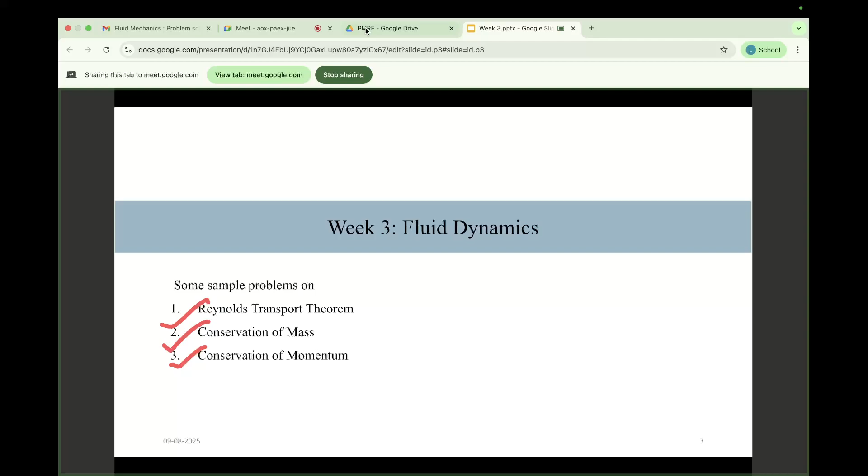Okay, so what I will do today is show a question and give you 1 or 2 minutes to solve it. If you are able to solve the question, please let me know, whether the answer is correct or not. It doesn't matter, but try to answer at least. That will definitely help you. You can answer in the chat box, or you can open your mic and answer.

So what is the first question? The first question is: which of the following is an intensive property? These four are the options. First try to answer, and after that I will explain the concept of intensive and extensive properties. So please try to answer this question.

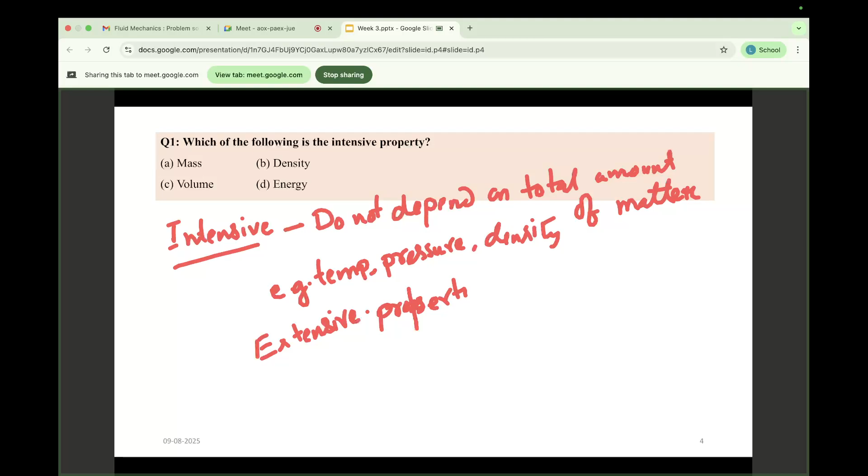Some examples: temperature, pressure, density. And for extensive, mass, volume, energy, momentum, all these are extensive. So how will you quantify which one is extensive and which one is intensive? To quantify this, let us assume a condition. This is a vessel, right? It has a certain amount of water.

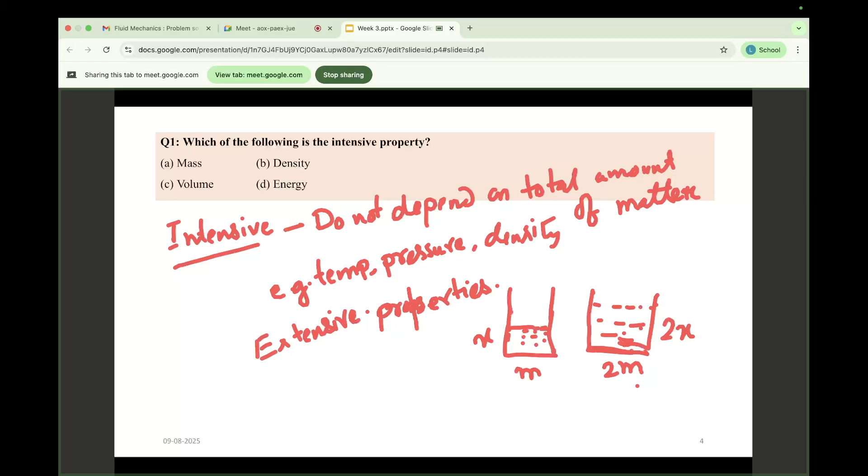So in the same vessel, let this amount be x. If you increase this amount to 2x, some of its properties will definitely change, right? So say m is the mass of this system. If I double this quantity, what will happen? The mass will be 2m. That means it depends on the total amount of material, so it is extensive. Mass is thus extensive.

Similarly, if I talk about density, if I again increase this quantity, it will not change the density, right? Thus density is an intensive property. Also temperature: say in this x quantity of liquid the temperature is T. If I pour another x quantity of liquid, the temperature will not change because I am pouring it at the same temperature. So if increasing the amount of material doesn't change the property, then it is intensive. That's why density is the answer.

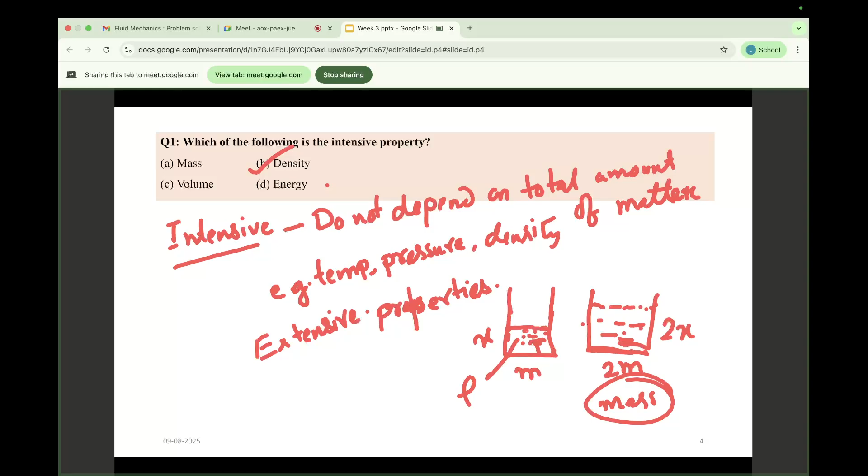And mass is also changing, as I have told. Also the volume, say x, if I increase it, it will be 2x. Energy, whatever energy is carried by this amount of liquid, if I double the amount of liquid, this energy will definitely increase. So it is extensive. The rest three are extensive properties; only density is an intensive property. So it's a good response from you, Arjun and Dev. Density is the correct answer. I think it is clear to you.

I am moving to the next question. The next question is that two statements are given, and you are asked to tell whether these statements are correct or wrong. Either the first statement is correct and second is wrong, like that, these are the four options. This is regarding the Reynolds Transport Theorem. I think in the class this is the first concept of the fluid dynamics part, so you have gone through this. Please try to answer. I am giving you 1 minute.

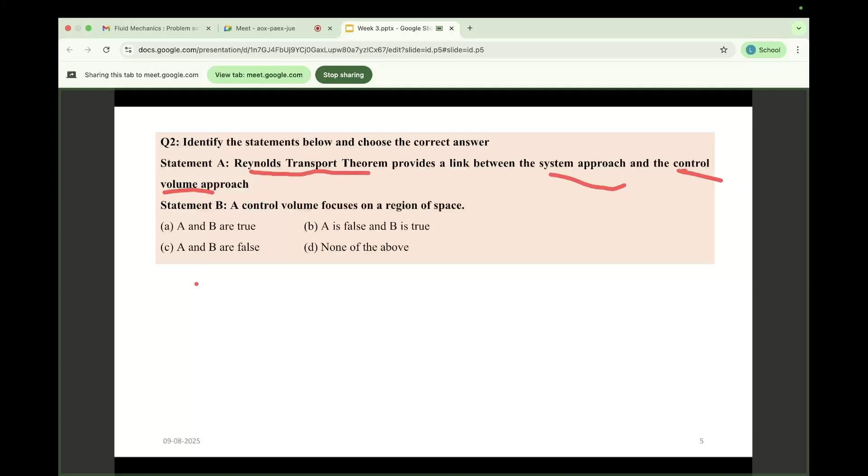Two terms are given here. One is the system approach, next is the control volume approach. So what basically is the system approach, and what is the control volume approach? I represent control volume as CV. The system approach means that in this approach we follow the same set of fluid particles over time. I am giving you a real-life example.

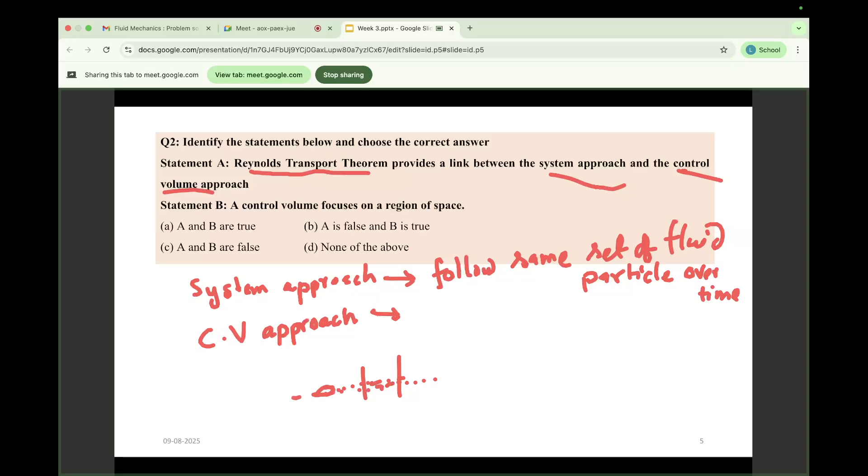Say in a river, a leaf or a bottle is flowing. If you are following this bottle with time, then this is called the system approach, because you are watching this system, this bottle. Whereas in the control volume approach, you only focus on a specific area. You observe this specific region, and at a specific time this bottle passes through this region. This approach is known as the control volume approach.

Okay. So the CV approach is also known as the Eulerian approach, whereas the system approach is also known as the Lagrangian approach. Always remember such real-life examples. In the first case, in a river a bottle or a leaf is flowing and you are following this leaf or bottle. In the CV approach, you only focus on a specific region, observing whatever goes through this region, not the specific object.

That's why the Reynolds Transport Theorem follows both these approaches. It follows a certain portion, and it also follows these sets of fluid particles. So it follows both. And statement B is: a control volume focuses on a region of space, which I have talked about. That's why the correct option is option A. All of you have answered it correctly.

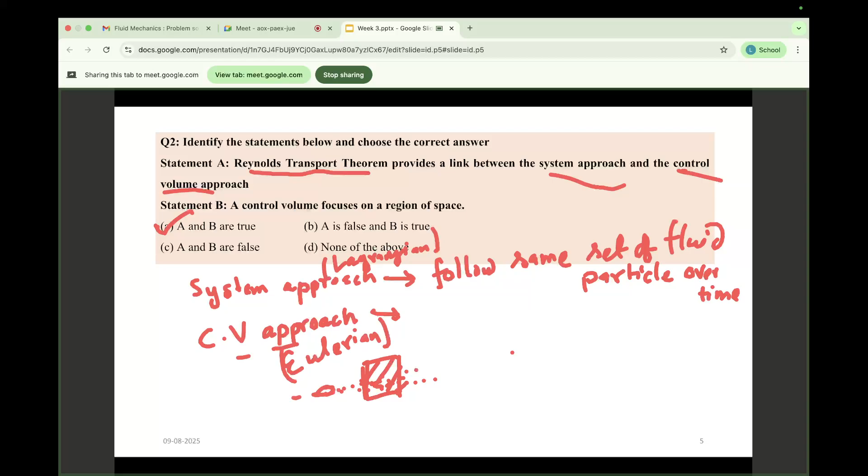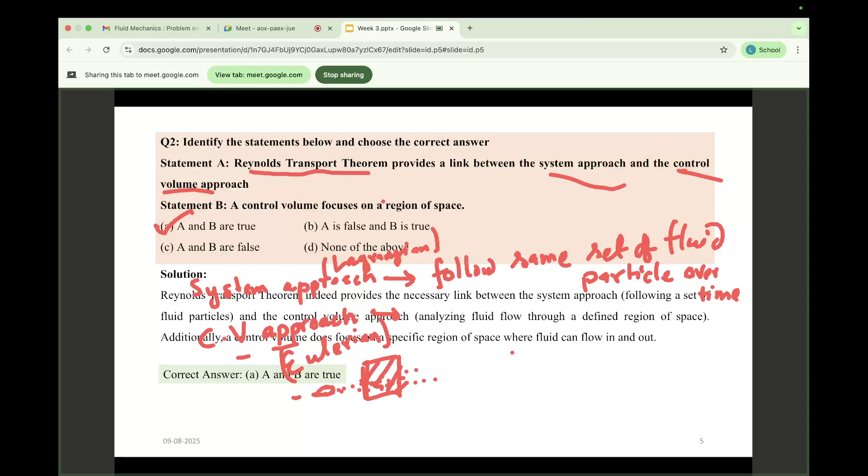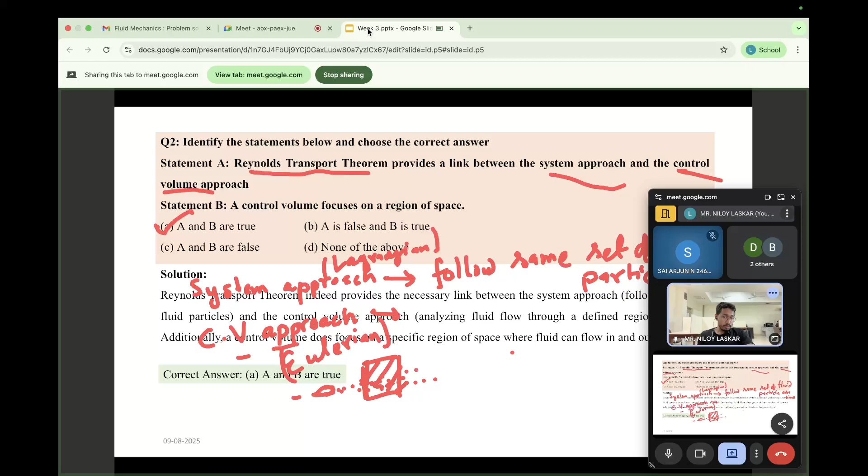Okay, so I am moving to the next question. Any confusion on this concept? Please let me know if you have any confusion, or else I'll move to the next one. Can I move to the next question? I think I can move. Yes, I'm moving to the next question.

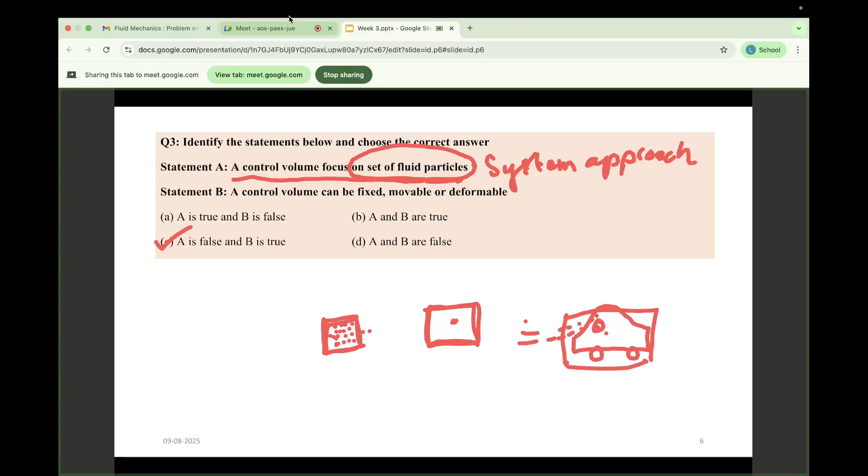So I think both of you have understood the mistake you have made. Is it okay? Yeah, okay. So I am moving to the next one.

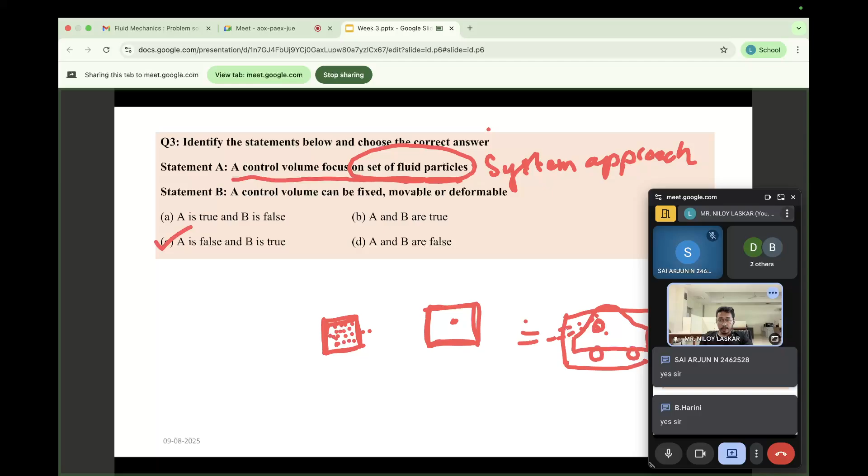Yes, this next question is a basic question. So this question states, the continuity equation is based on the principle of either energy, momentum, mass or force. Which one? So please try to answer.

Yes, one has answered option B, momentum, and another option C, mass. And that is energy. So three different answers I have got. So okay.

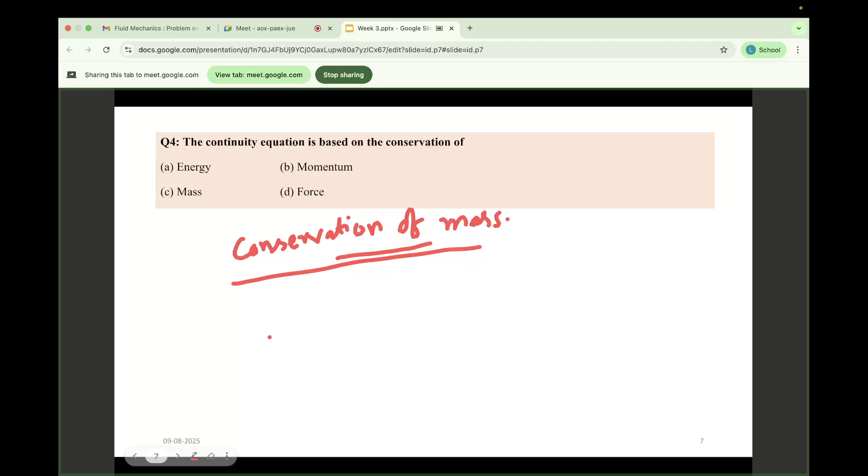So say this is a body. This is the inlet, this is the outlet. So what this law states is, whatever is entering through this inlet and whatever is coming out through the outlet, that should be balanced. Say if a certain particle m1 is entering into the system and m2 is coming out of the system, then m1 minus m2 means a certain mass is stored here.

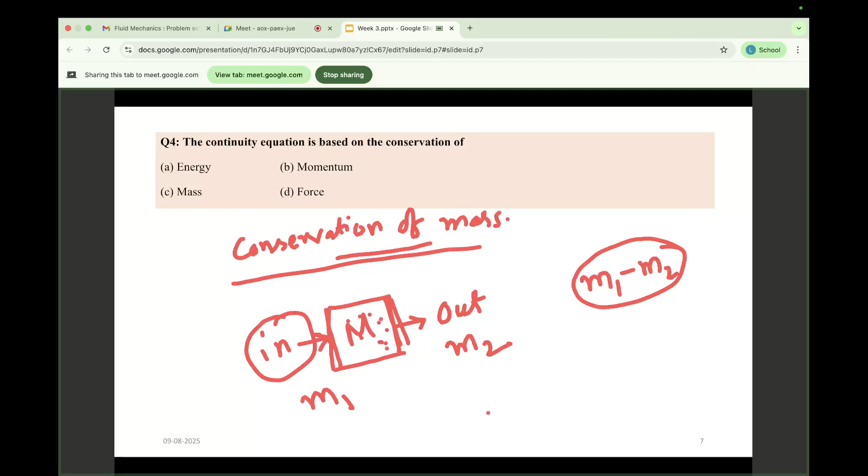Okay, so that is what this theorem tells, that if m1 is entering into the system and m2 is coming out of the system, then there must be something that is kept here. Say I call this capital M. That means if m1 is entering, what is entering is m2 plus M, because the total entering through this inlet is m1 and only m2 is coming out and a portion is left in the system, that is plus M. So that is the fundamental concept.

And say if it is an incompressible fluid, in case of incompressible fluid, what will happen? So I am erasing this and writing it again for you.

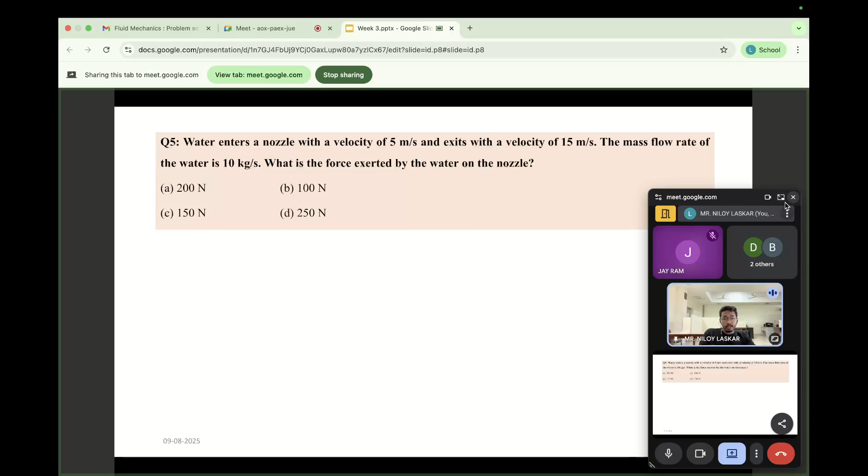So see, in this question, what is given? The water enters a nozzle with a given velocity, right? This is the inlet velocity and this is the outlet velocity. The mass flow rate of water is also given. You are asked to find out the force exerted by water on this nozzle. So that's a simple question.

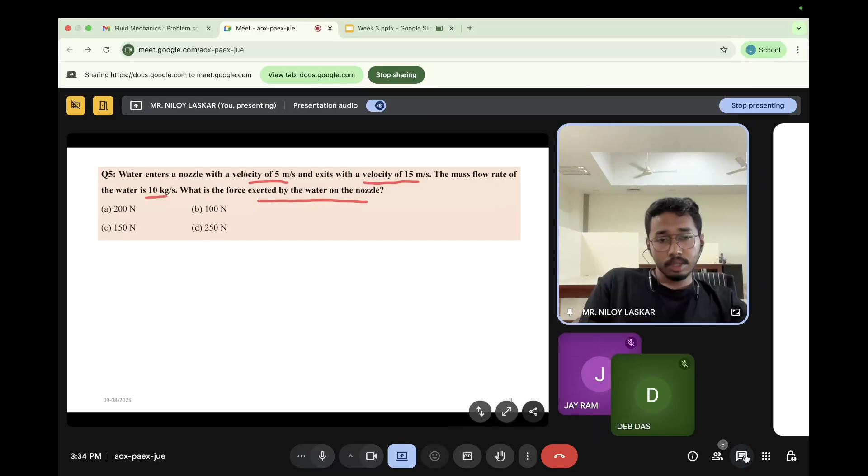So please try to solve. I am giving you 2 minutes to solve this question, and if you are able to solve it, please answer in the chat box, or you can also turn on your mic and answer. So Harini has answered option B, that is 100 Newton. Let's see what others are answering.

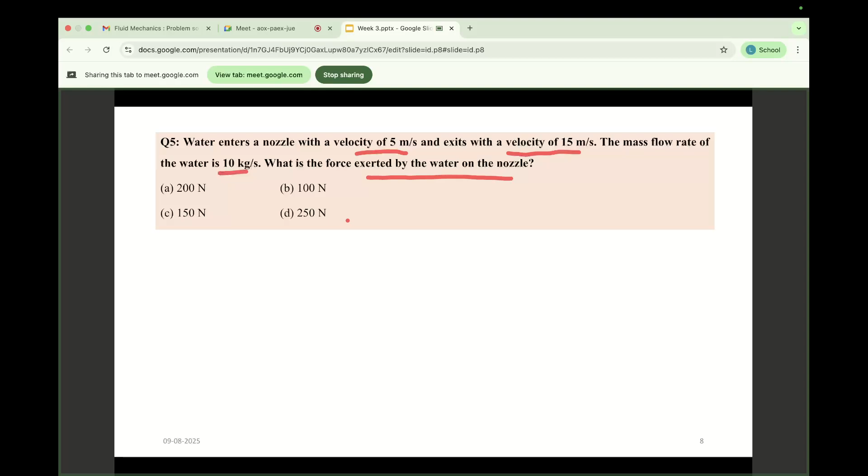So I am solving this for you. Nihalini has answered. So see, from the conservation of momentum equation. In the last slide I discussed two things: one is the conservation of mass, the other is the conservation of momentum. Just a minute, I am just confirming this. What I talked about is conservation of momentum, and the previous one I discussed is conservation of mass.

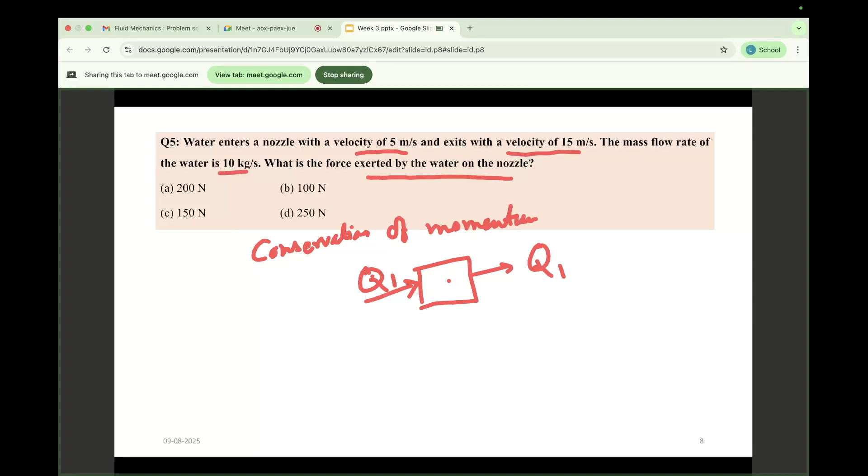So for momentum, whatever flow rate is entering a system, it should come out with the same flow rate. I am talking about mass flow rate, not mass. If it is mass, then this is conservation of mass, but in momentum, it should be the momentum carried by this mass, that is q1, and this should be q2. Okay, so here they are talking about force.

So what basically is force? Force basically means the mass flow rate, whatever mass is entering this system, into outlet velocity minus inlet velocity, right? So m dot is 10 here, V outlet is 15, V in is 5. So that is 10 into 10. So the correct answer is 100 Newton. Your answer is correct.

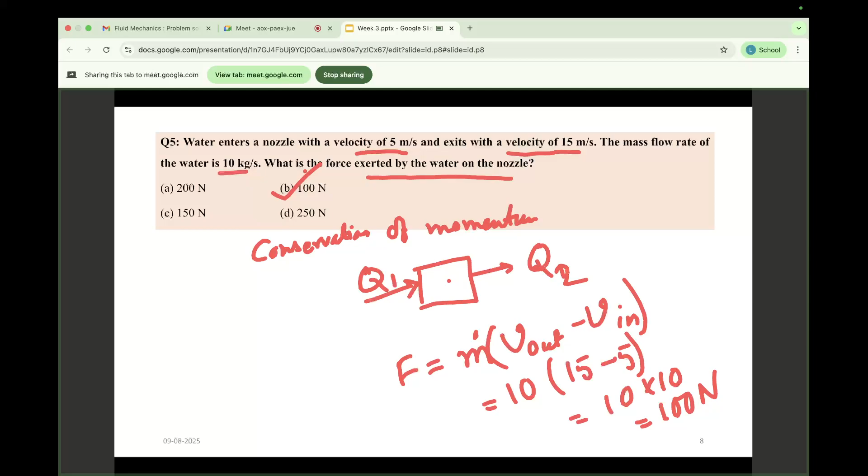So I think you have understood this. Please rectify what I discussed in the earlier session. Most probably in the earlier slide I called this conservation of mass by mistake. It's conservation of momentum. So I am moving to the next thing. This is the next question.

In the first 5 questions, the level was quite easy, and as we move to the upcoming questions, the level will slightly increase. So you better use your concepts, that will help you clarify all these things.

So first, what is given? Consider a steady and incompressible flow through a converging nozzle. The cross-section area is given for the inlet and outlet, and also the velocity of the inlet is given. So you are asked to find out the velocity of the outlet.

So what I have told in the earlier slide, which concept is linked with this velocity and mass? That is the conservation of momentum, right? What basically is momentum? Mass into velocity. So as this velocity is given, indirectly this conservation of momentum will come into play. If the mass is given for a certain question, you first think about conservation of mass, and after that you think about conservation of momentum.

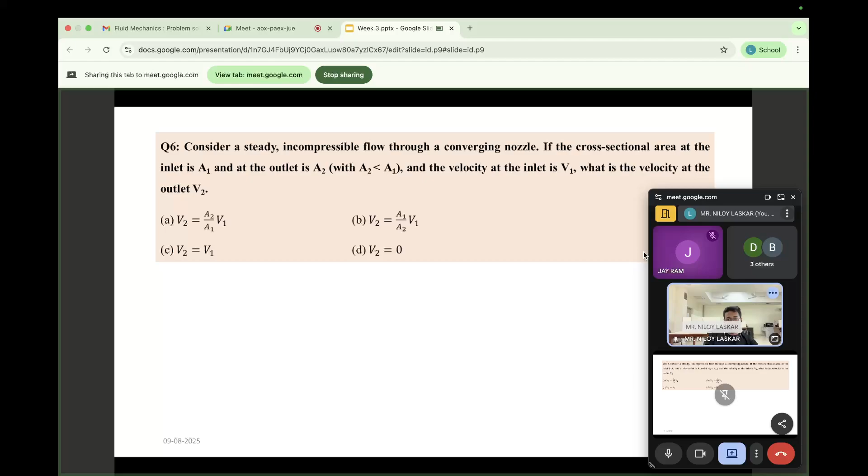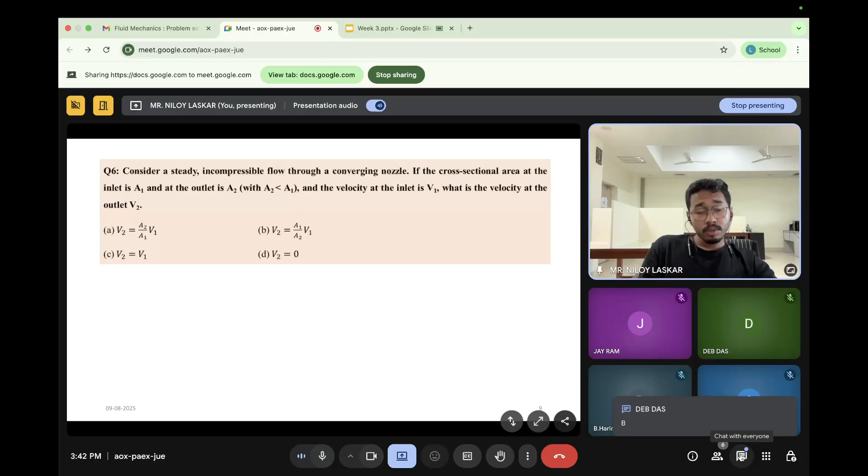So please try to solve this question. I am giving you 2 minutes to solve this one. So Rani said option B. So Jairam, you please try to answer. So please try to answer. So two people have answered option B. So let me solve this one.

So for any steady flow, what does this equation basically state? m dot means mass flow rate. So if I talk about this continuity equation, whatever is entering the system should come out. I means inlet and O means outlet. So whatever is entering the inlet and whatever is coming out should be the same. Say this one is m1 and this one is m2. The dot represents mass flow rate, that is change in mass per unit time. That is equal to rho A V. That is the formula, right?

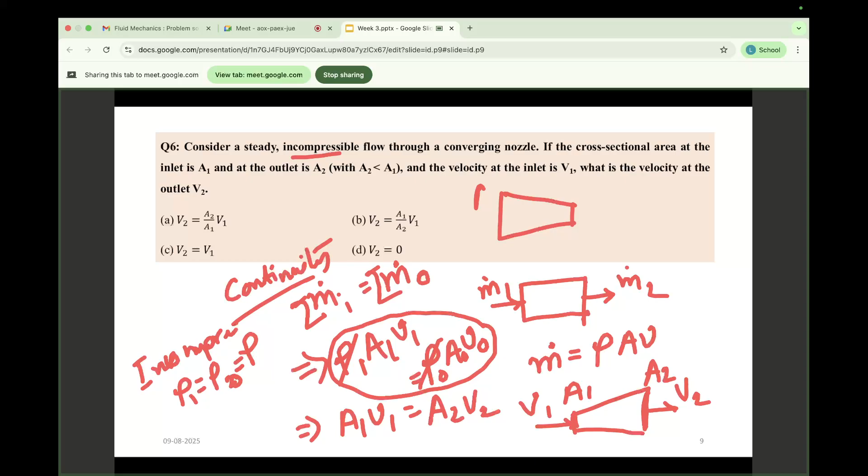So in this question what is given? The area is more at the inlet and smaller at the outlet. That means they are talking about a converging nozzle. Here the velocities are V1 and V2. We are asked to find V2. So V2 equals A1 by A2 into V1. That's why option B is the correct answer. It's great that you are answering. I think it is clear to all of you.

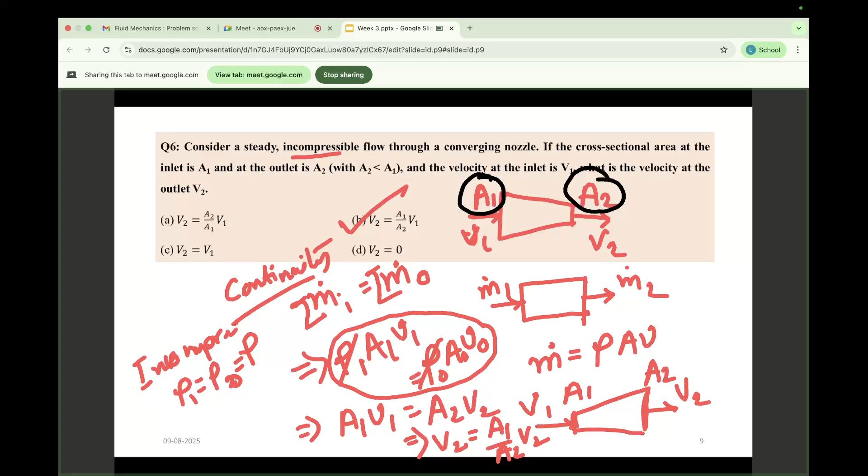Now, just a question for all of you. In this question it is given A1 is greater than A2. Can you tell whether V1 is greater or V2 is greater? This question can be asked. So please try to answer. Which one will be greater, V1 or V2? So Arjun, Harini, Deb, Jairam, anyone? Please try.

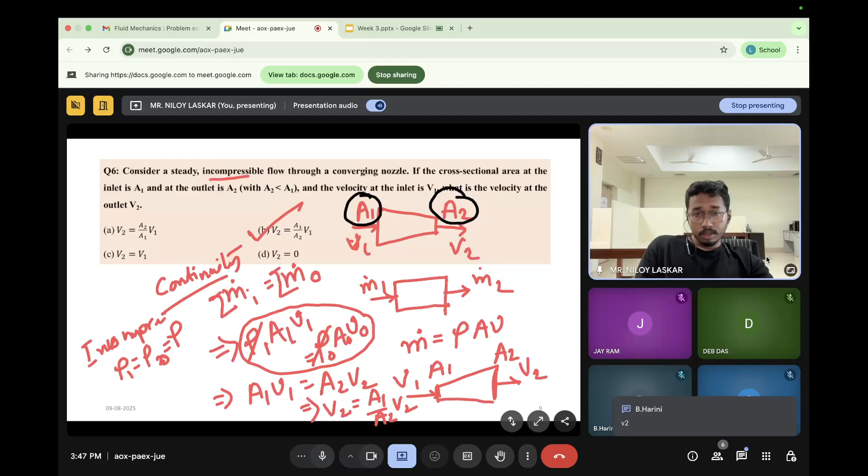So Harini's answer: V2 will be greater. That is correct. Why? V2 equals A1 by A2 into V1. Since A1 is greater and A2 is smaller, if I divide these two, the value will be greater than 1. So that's why V2 will be greater than V1. So I'm moving to the next one. Our correct answer is option B.

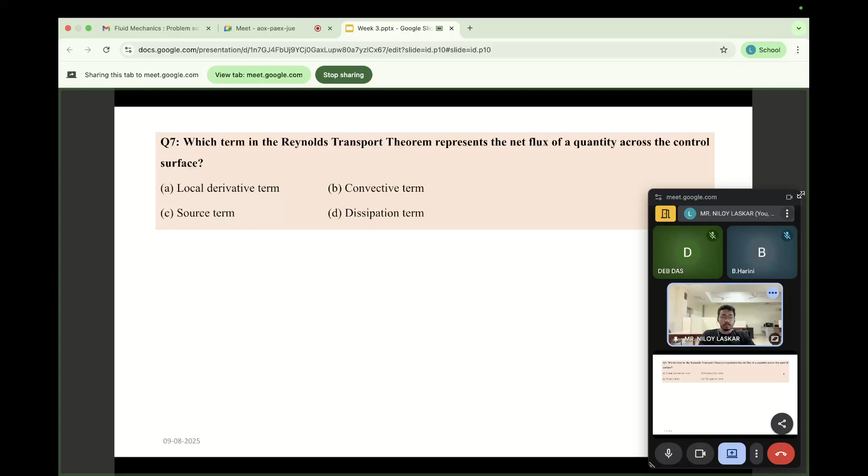So as you have gone through these classes, first let me write this equation for you. This is the Reynolds transport theorem, more specifically known as the RTT equation. So I am writing it in generalized form. That means you can write this equation for mass, momentum and energy. So any property, it may be mass, velocity, temperature, I represent it as B. So that is B of system.

So what does this equation tell? The derivative dB by dt means rate of change. If in the derivative denominator there is t, that means the change of this parameter with respect to time. This thing is indicated here. Next is CV, density into a term beta. I am explaining all these terms for you. First let me write down this equation.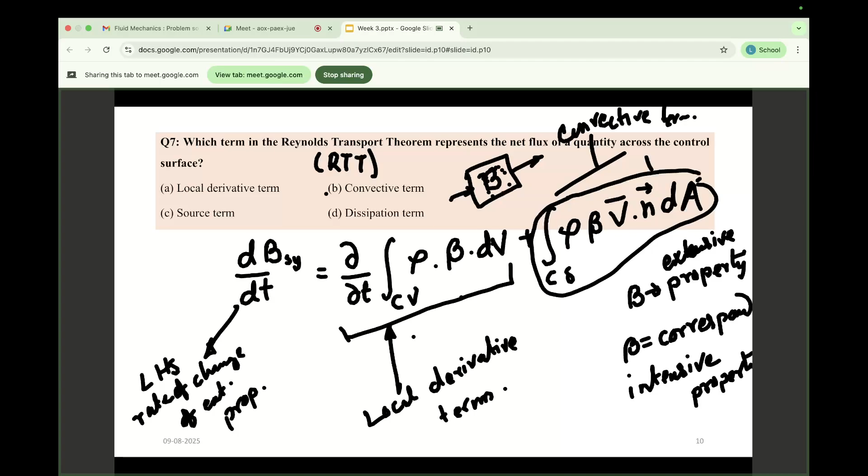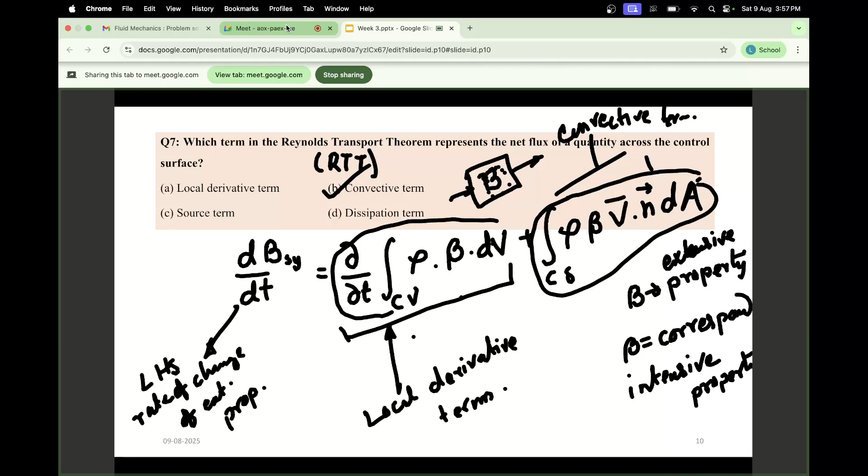And the second term is the convective term, the most important term. It represents the amount entering into the system and the amount coming out of the system, that means the net flux. The word flux indicates whatever is coming in and going out of the system. So this second term on the right hand side is the convective term, and the first term indicates whatever is accumulating in the system. I think you understand this concept.

So please go through this concept, because if you are appearing for this NPTEL course exam, you can find such types of question. They will not ask you to write this equation, but they will ask you basic concepts, like which term will represent the accumulation inside a control volume. Then you can say this local derivative term. Okay, so that is the thing.

So I am moving to this next question. Again, it's another question on this concept of RTT, Reynolds Transport Theorem. So what is the question? In the context of RTT, which of the following statements is most appropriate? So please try to answer. I think I have discussed that in the earlier slide. You remember this system approach and the control volume approach. In this slide, I have talked about this thing. So please try to answer.

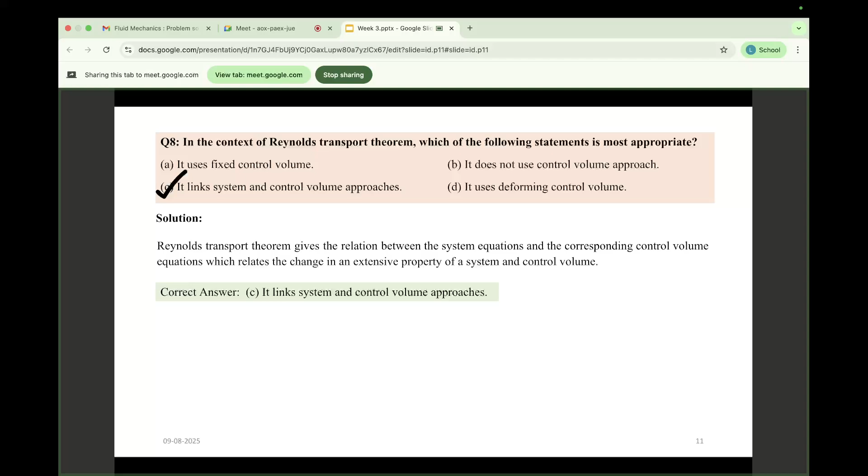So I am moving to this next question. It's a quite interesting question, again from the RTT theorem. As I have told you about this RTT concept in detail, and also the parts of this equation, can you please answer this question? So please try. It's a tricky question, but it's the full equation that I have written. The left hand side, right hand side, two terms: the local term and the convective term.

So René has answered option A. Okay, let's see what they are answering. D. Okay, say it's option D. And they have answered option C. So I think there is a confusion for them. Yes, option D is correct. That is true. So why?

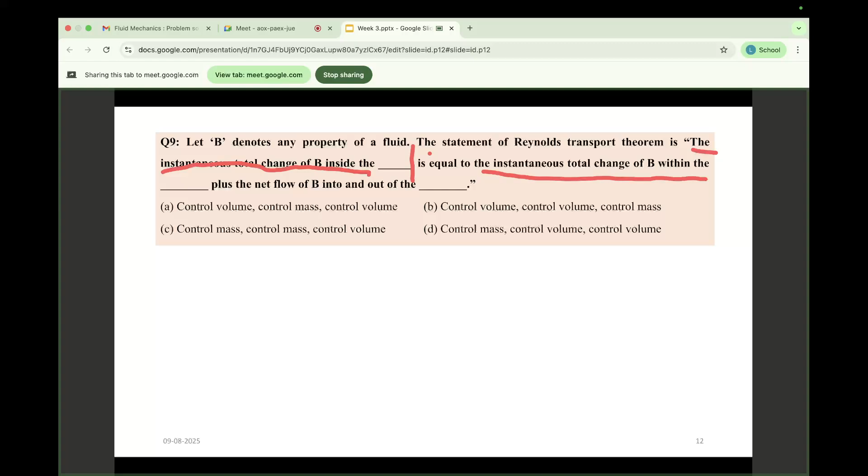Even if you do not remember this equation, understand one thing: it incorporates two concepts, the system approach and the control volume approach, right? So on one side there should be the system approach, on the other side the control volume approach. If I split this statement into two parts: the instantaneous total change of B inside the control mass is equal to the instantaneous total change of B within the control volume plus the net flow of B into and out of it.

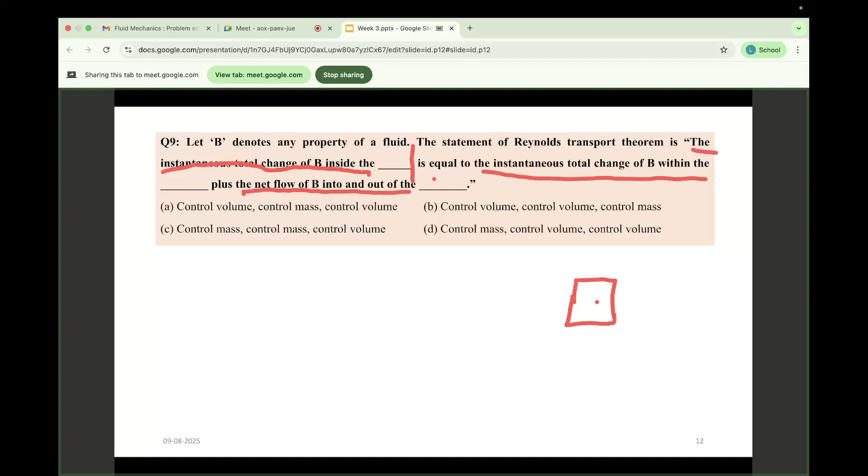Remember I talked about this thing. Here it is clear that I am talking about the control volume, because whatever is coming into and going out of this control volume, I am talking about that, right? And the first is the instantaneous change of B within, meaning whatever is accumulating, that is talking about the CV. So the right hand side is all about the control volume approach, and the left hand side is about the control mass approach. That's why option D is the correct option.

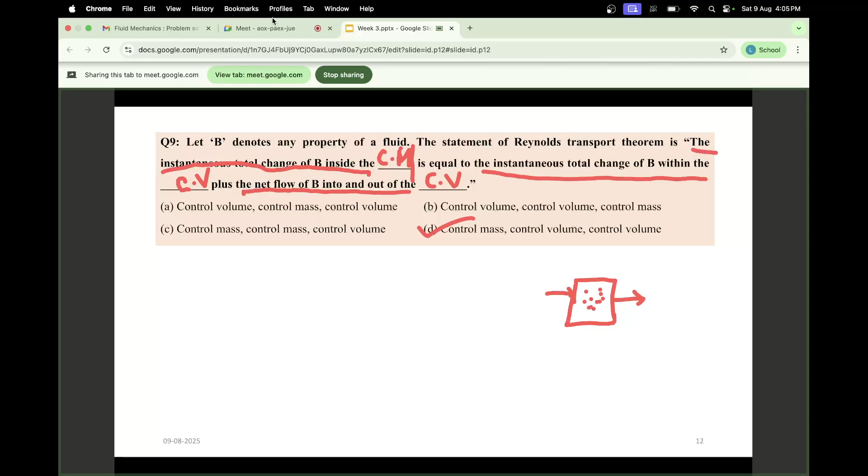So see how this concept is quite important. If someone understands both concepts, the system approach and the control volume, then they can easily answer this question. So have you understood the mistake that you made, or is there any confusion from your side? Okay.

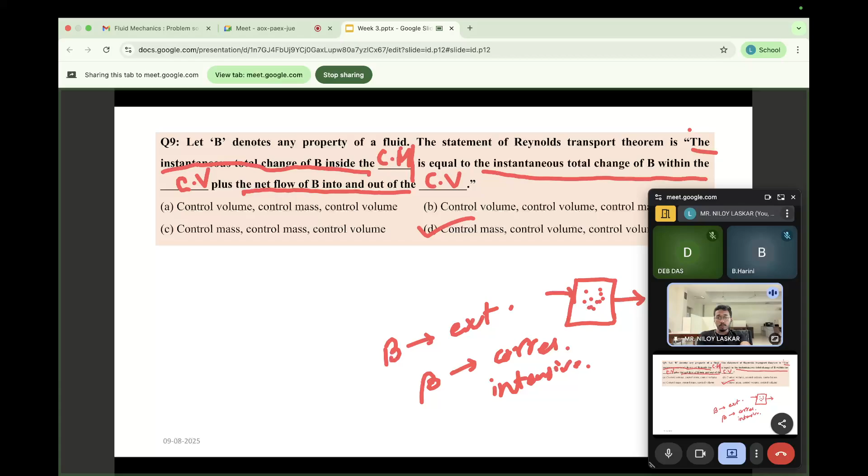Another thing, I have talked about B and beta. What is B? B is an extensive property and beta is the corresponding intensive property, right? So please remember this concept. It is quite important. Based on this I am giving you one question, so please try to answer. So this is the question.

So what is given? Momentum is one of the extensive properties of the fluid; because it depends on mass, it will definitely be an extensive property. This momentum is represented by B, as given in this question. You are asked to find the corresponding intensive property of the fluid. So René said option B. Let us see what they are answering.

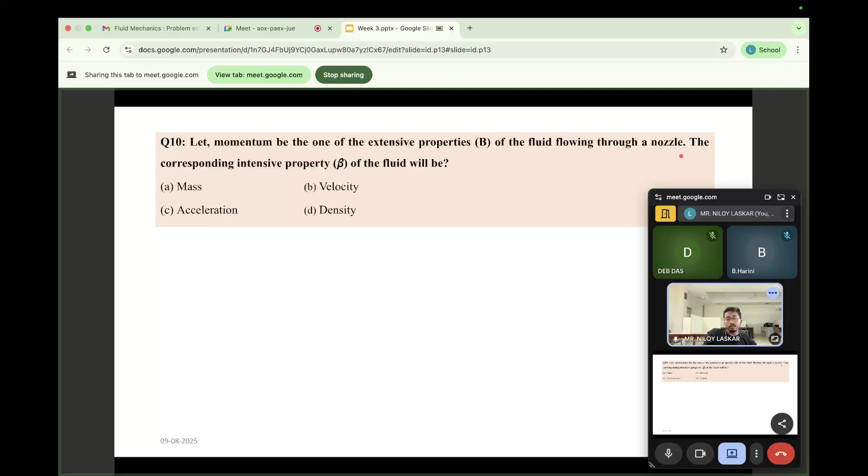They are saying that it is mass. So again, they are confusing themselves with this concept. Just a minute.

So see, as I have already told, B is my extensive property. So what is the basic difference between extensive and intensive property? The basic difference is this: intensive property is independent of the quantity of matter in the system. So this one is my extensive given, and beta is the intensive.

So as beta is independent of the material of the system, that means here I have to take the derivative with respect to mass. Okay, mass is the amount of material in the system. That's why it is a derivative, or someone can directly divide B by m, but the feasible solution always is the derivative with respect to the quantity of the material. It can be mass or it can be volume, right?

So what B is given in this question? It is the momentum. We know momentum is mass into velocity, right? So velocity is a constant here, so v will come out and the derivative of this is 1, so it should be velocity. That's why the correct answer is option B. So option B, velocity, is the correct answer.

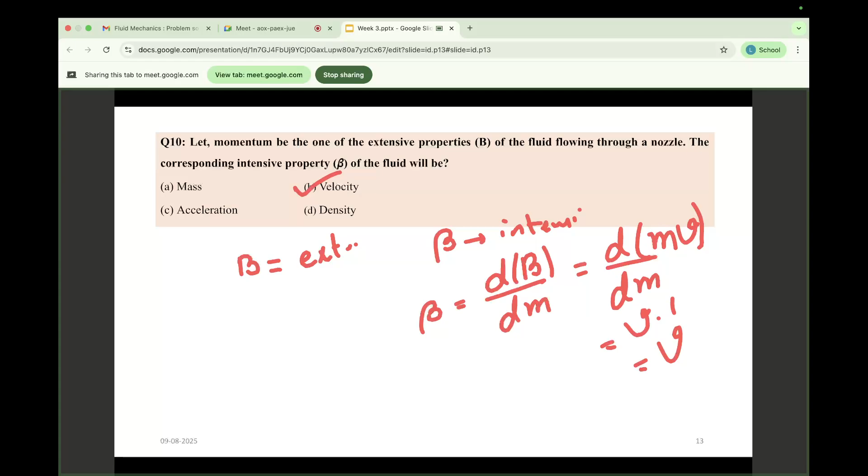See, this RTT concept is quite important. So I will again suggest that you please go through this concept clearly and try to understand each and every term precisely, because it's not just for this exam. If you are in BTech, it is quite important for you, because you have to do your project on all these things, maybe on heat transfer or fluid mechanics. Even in interviews or placements, they can ask you basic questions. They will not ask you to write this equation, they will ask you what is the significance of this equation, like that.

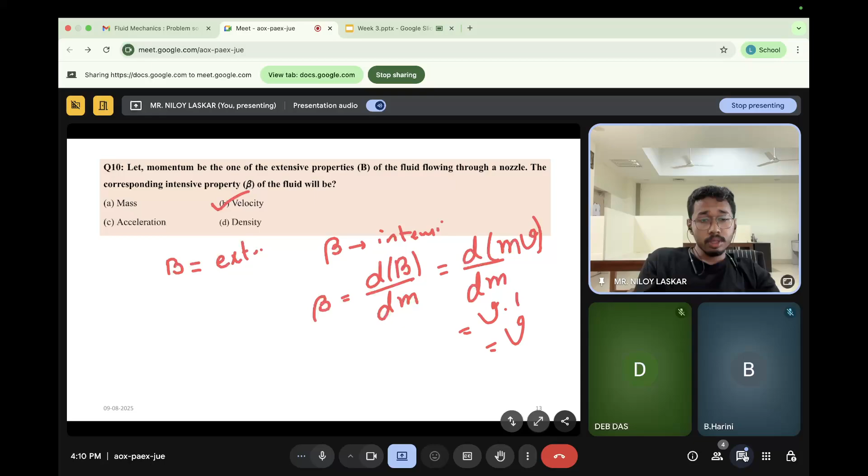Okay, so you both are in. So any confusion, Harini or Deb? Hmm. So you are in BTech or MTech? You both? Okay, so you are in BTech. So that's great. So you will get to understand a lot of things.

So whenever you are learning a course like fluid mechanics, which is an interdisciplinary course, even mechanical students are learning these courses, please try to correlate each and every concept with real life scenarios. One of the important ones is the Lagrangian approach and the Eulerian approach. If someone asks you the difference, the Lagrangian approach is the system approach, and the Eulerian approach is the control volume approach.

If someone is not from the engineering department, say from basic science, arts or commerce, they will not understand this concept. So if someone asks you, how will you tell them? You can tell them with a real life example. Say a bottle or a leaf flowing over a river. If you are focusing on this bottle, then it's the Lagrangian concept, right? The words seem complicated, but the concept is quite easy. And if you focus only on a specific region in the river, then it's the Eulerian approach.

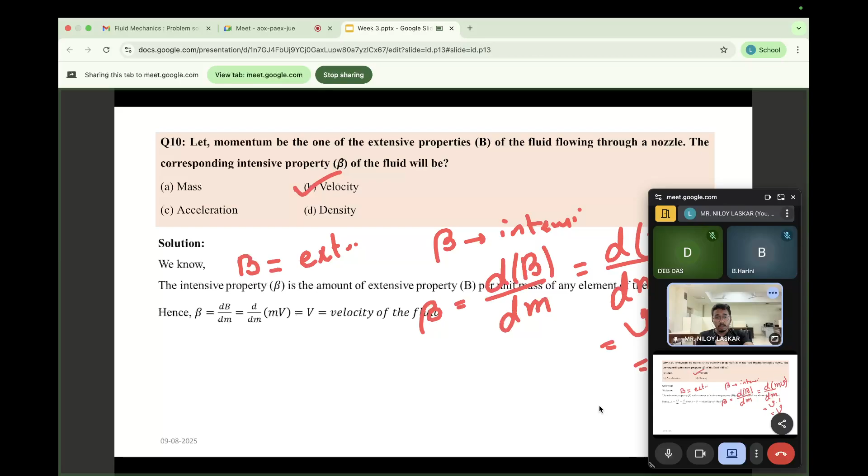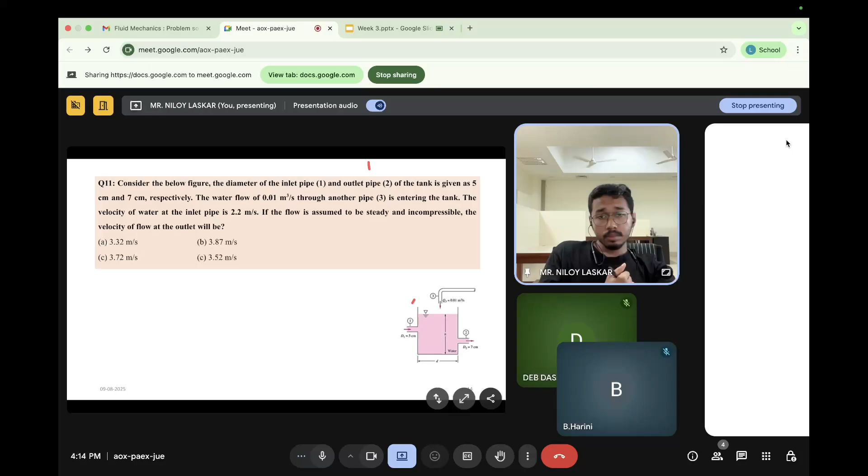Also the flow is assumed to be steady and incompressible. The velocity of flow at the outlet will be? So you are asked to find out the velocity of the flow at the outlet, that means V2. So please try to understand. So see, this is another conservation equation. I am giving you 2 minutes to solve this one.

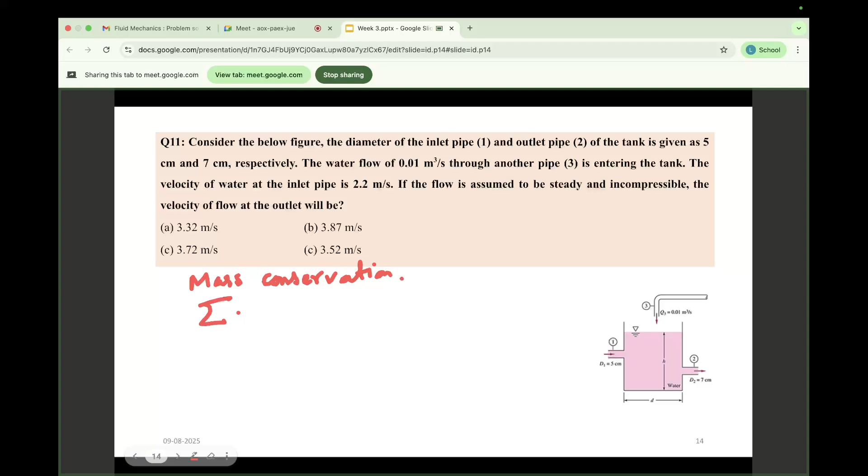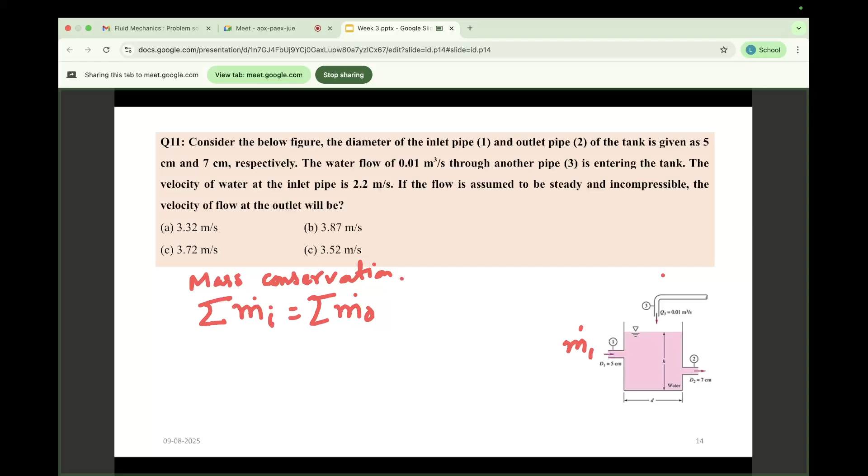Mass conservation. So mass inlet equals mass outlet. So what is mass inlet? From 1 mass is entering into the system, and from 3 mass is entering into the system, and mass is coming out from the system, so the outlet is M2. So in place of summation of Mi, I can write M1 dot plus M3 dot equal to M2 dot. So I have to find out the values of M1, M2 and M3. The general formula of mass flow rate is rho AV, or I can write rho Q, since Q is AV. Q is the volume flow rate.

So here, is density given? Density of water, since in this problem everything is water, right? So in case of M1, I write rho. I am not putting the value of rho because rho is common in all three. Here the diameter is given, so I have to apply the area formula. Area equals pi by 4 into d square. The diameter is 5 centimeter, that means 0.05 square, into velocity, which is given as 2.2. So in place of m1 dot I can write rho pi by 4 into 0.05 square into 2.2. So I got m1, right?

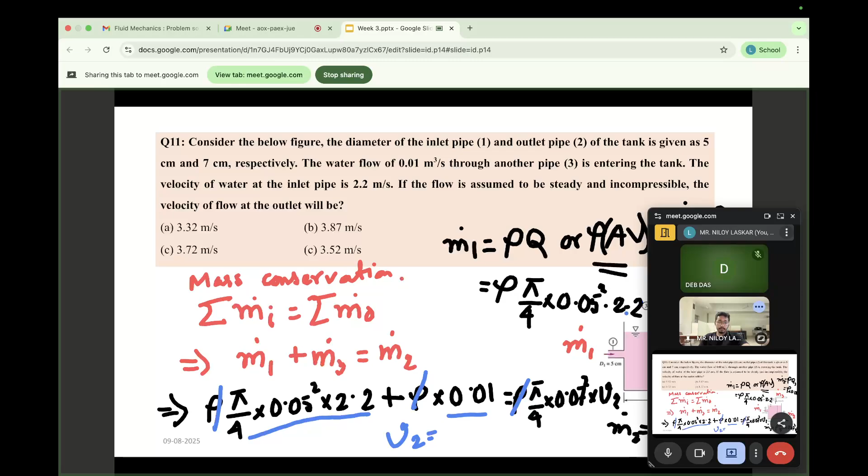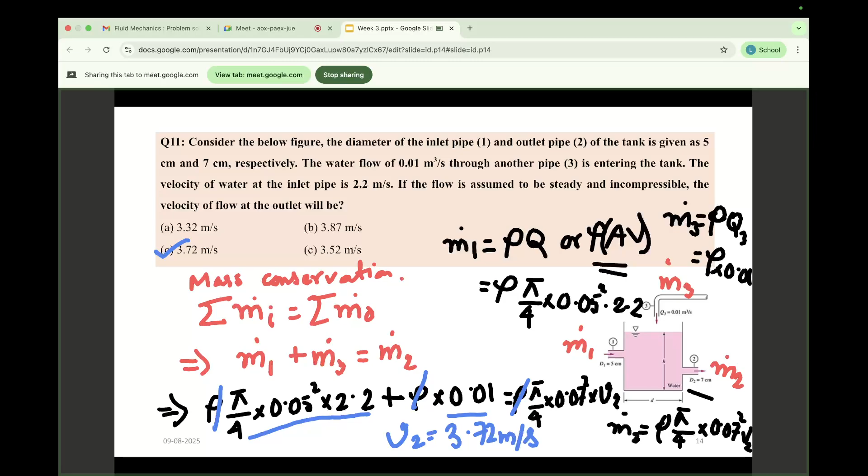So the correct answer is option C, 3.72. So accordingly you can find this V2. Okay. So I am moving to this next question.

So in this question, what is given? A cylindrical tank of radius 1 meter is filled with water up to a height of 2 meter. Another thing that is given in this question, water is being pumped into this tank at a rate of 0.1 meter cube per second. So Q is given. So you are asked to calculate the rate of change of mass of water in the tank. So these are the four options. This is the similar type of question that I have discussed in the earlier one. So please try to answer.

So I am giving you 1 minute time to answer this one. Please try to answer this one. This is similar to what I have discussed in the earlier question. So they have answered option A.

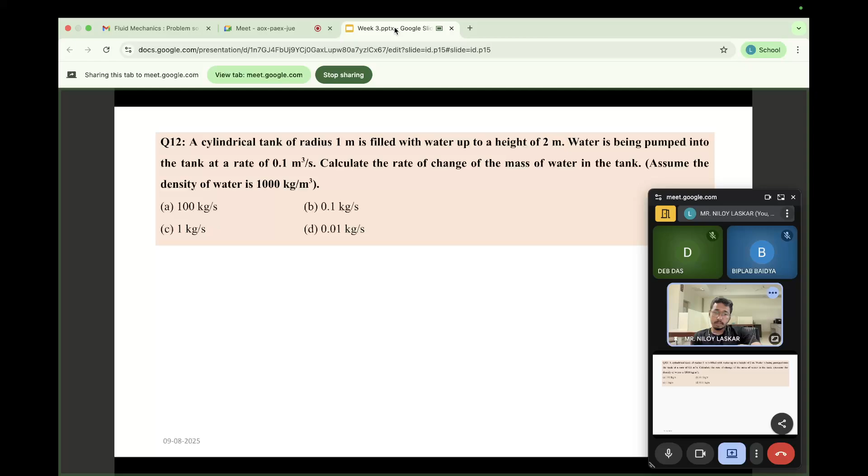Okay. So Biplab, can you try, or I will solve it for you? Okay. So I am solving this thing. So please have a look.

Again, the similar concept is here. Say this is the tank. In this tank, up to this water is already there. It is given 2 meter height, and all this is given. And say from somewhere here, Q is coming as 0.1. That means this is the inlet, mass flow rate in the inlet. So you are asked to find the rate of change of the mass of the water.

So in this question, whether some amount of water is coming out of the system or not, nothing is given. That means whatever is pouring into the system, it is storing here. And also it is not said that it is a steady flow or a steady system. So from the conservation of mass equation, they are asking to find the rate of change of mass of water. So that means dm/dt.

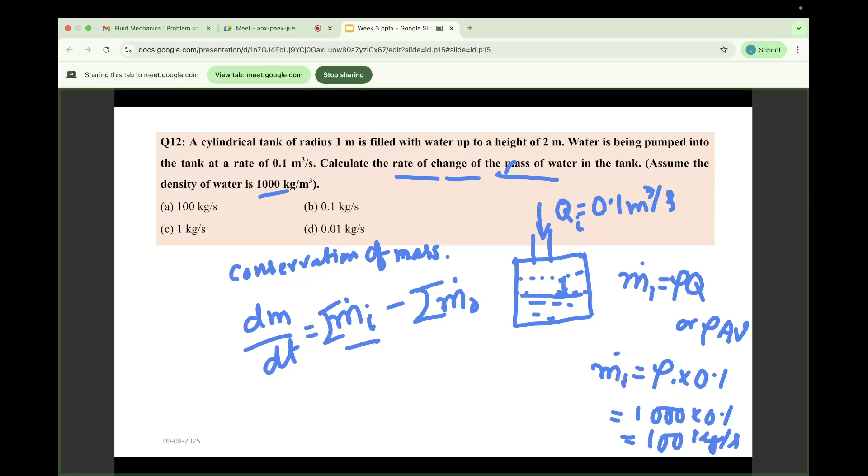This M1 dot indicates Mi, because in the inlet the mass is entering through only one area. So instead of this one I can write M1 dot. And outlet, is there any outlet? No outlet is there, right? As no outlet is there, I can say this term is 0. So what is M1 dot? M1 dot is 100 kg per second. Okay. So option A is the correct answer.

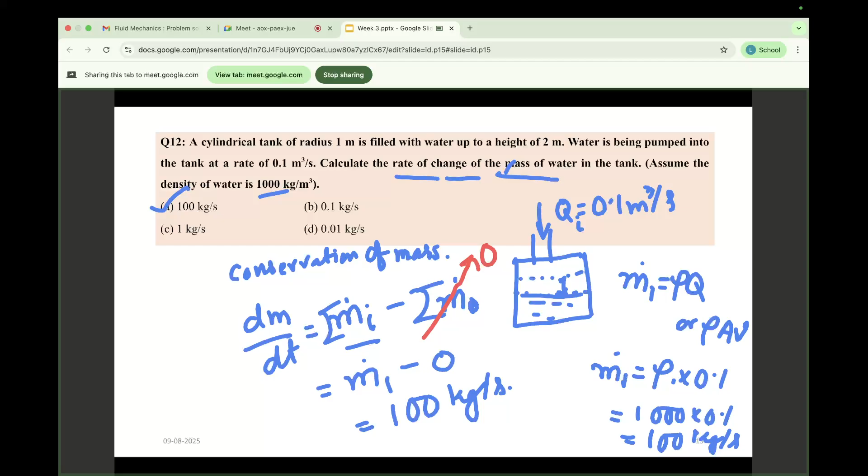Is it clear to you? Is it clear to you, Biplab and Deb?

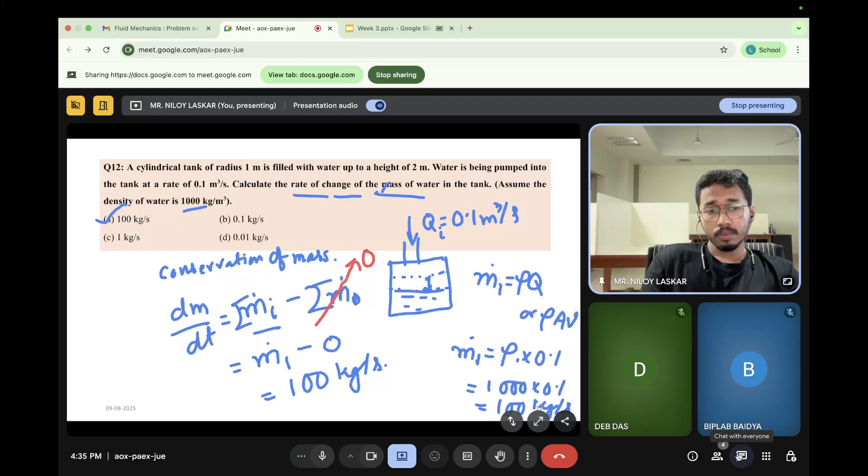So if you have any question, you can ask me, or I will move to the next slide. Kindly let me know. So I think it is clear to you, Biplab. So I am moving to the next one.

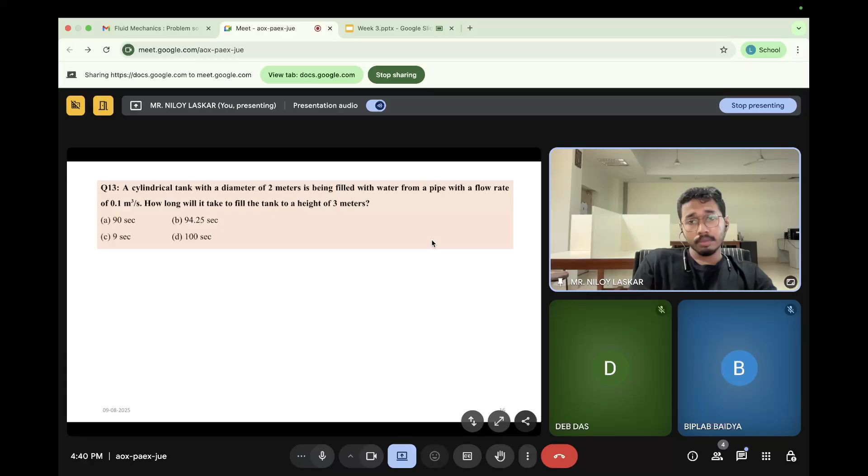So see, what basically is given here? In this question, the diameter of the tank is given. So say this is our tank, right? Diameter is given as 2 meter. This height h is given as 3 meter. So up to this height we have to fill through a pipe. So here Q is given, Q is 0.1.

So first I am calculating this volume. Volume here is pi r square h. What is r? Diameter is 2, so r should be 1 meter. So 1 square, and height is given as 3. So I can write it as 3 pi. Okay. So Q is given. We have to find how long, that means the time it takes to fill the tank.

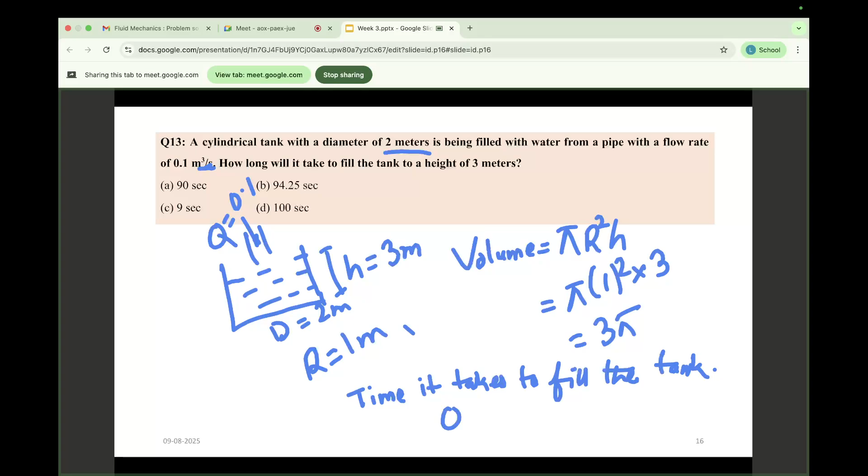So time it takes to fill the tank. The unit of Q is 0.1 meter cube per second. That means the volume per second. So if I multiply Q into t, what will I get? Q into t is equal to this volume, right?

Therefore I can write T equal to V by Q. So volume is 3 pi and Q is given as 0.1. Now pi is 3.14. So 3 into 3.14 divided by 0.1. Please calculate. If you calculate, you will get the answer as 94.25 seconds. So that is the answer. So is it clear to both of you?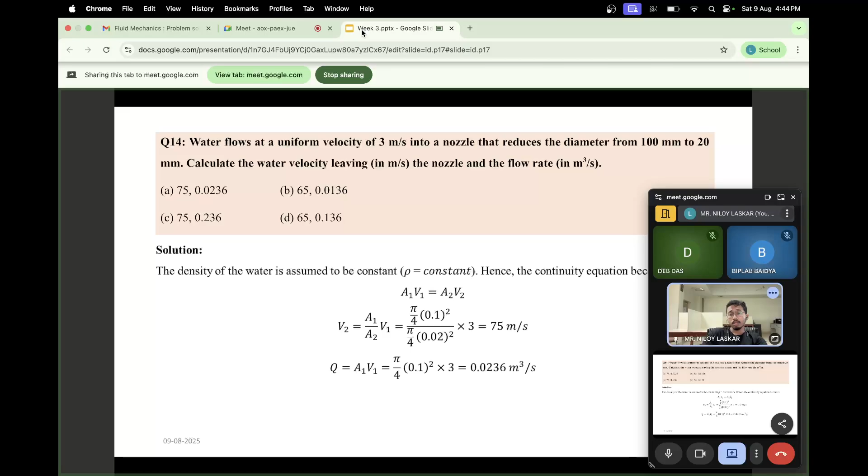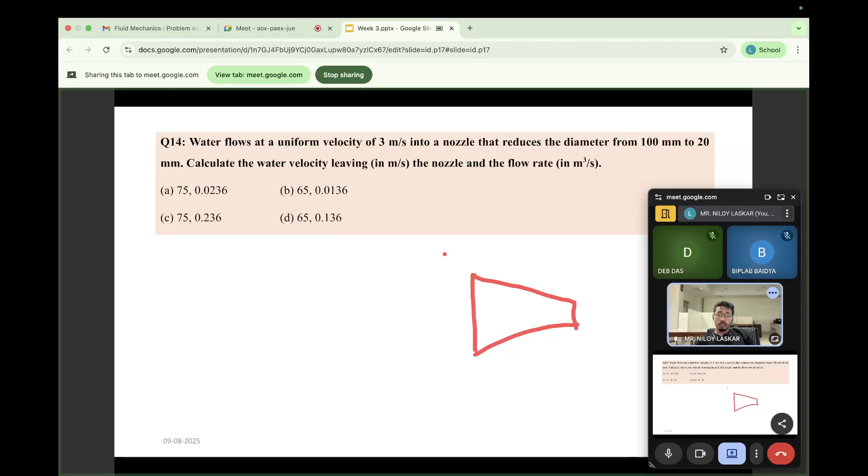So that is the question here. So I am just drawing this diagram for your better understanding. So in this question, say that a nozzle is there. So here area A1, A2, and say this velocity is V1, this one is V2. So given diameter is 100 mm, here diameter is 20 mm.

Okay. So you are asked to find V2, because already V1 is given as 3 meter per second. So you can use this concept, this continuity equation. So please try. I am giving you 2 minutes to solve this one also. So see, similar types of question I have discussed in the earlier slide. So try to utilize this continuity equation and you will be able to solve this one.

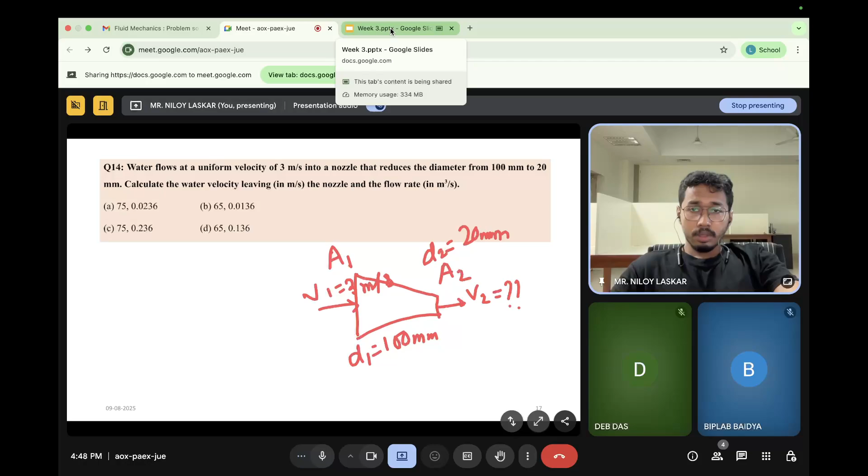So I am solving this one for you. So please have a look. As I have mentioned in the earlier slide, if in any question velocity or mass flow rate is given, you first think of the continuity equation, that is the conservation of mass equation, and after that go for the momentum equation. So what does this continuity equation, or the mass conservation equation, state?

So see, water is given, right? In a nozzle, we know there is a steady flow, so no accumulation. In this question, there is no talk about accumulation. So whatever mass enters the system and the mass coming out of the system should remain the same, because nothing is accumulating. At the inlet, area and velocity are given. So I can write rho A1 V1 equal to rho A2 V2, because at the outlet the mass flow rate is rho A2 V2.

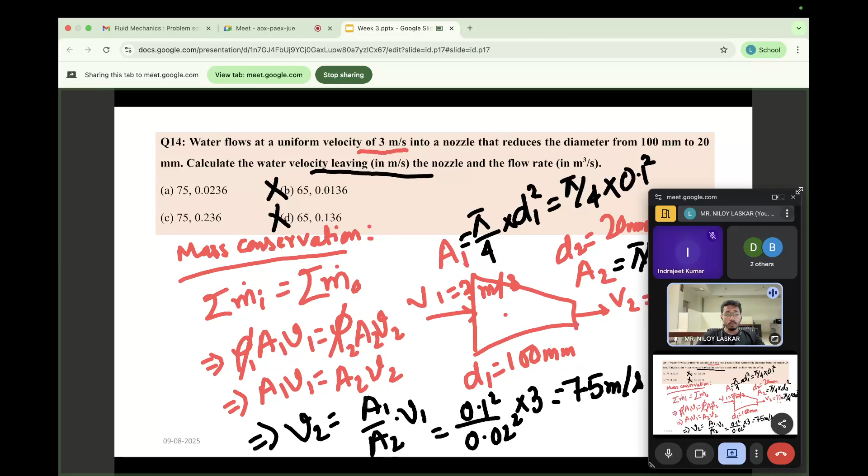Next they also ask to find the flow rate. What is flow rate? This flow rate basically is Q. They are asked to find Q. And I know that whatever the value of Q1 and Q2, they should be the same, because mass inlet and outlet are the same. So I can write Q as A1 V1. If someone wants, they can also calculate using A2 V2.

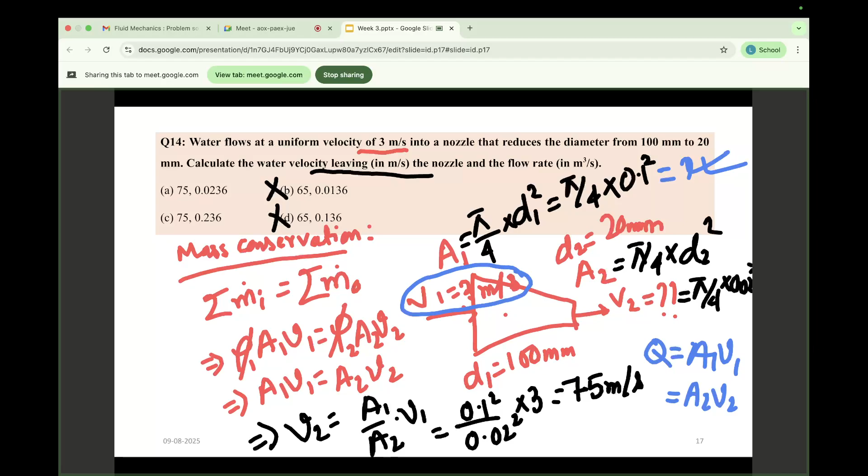So A1 is this one, you will get some value here, and V1 is 3. So you just put down this value, or you can put down V2 and A2. The answer you will get is 0.0236 meter cube per second. So that's why option A is the correct option here. Okay, that is the solution. This is a simple question.

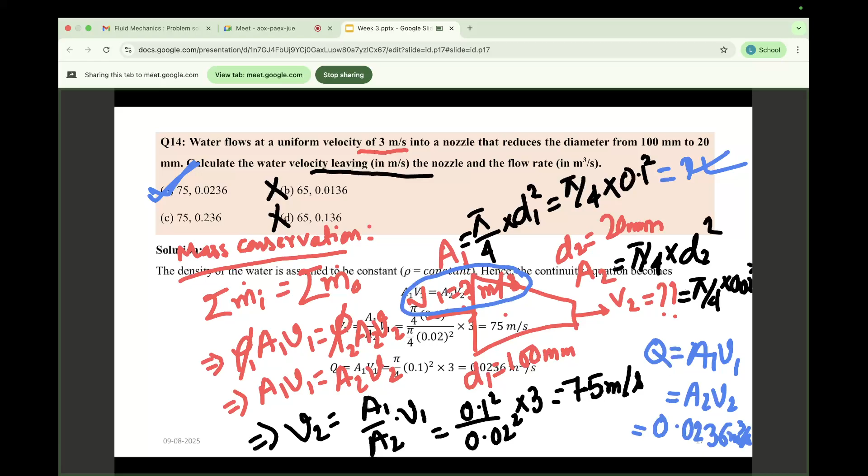So I am moving to the last question of this session. As you have gone through this concept, you can easily answer this one. A figure is given where there is an inlet represented as 1, and 2 outlets. It is asked to find the rate of change of mass of water in the device. That means something is accumulating in this system, so the mass flow rate entering and the mass flow rate coming out should not be equal. So please try to calculate.

Deb and Biplab, please try to calculate. This is the last question for today. So I am giving you 1 minute time to solve this one.

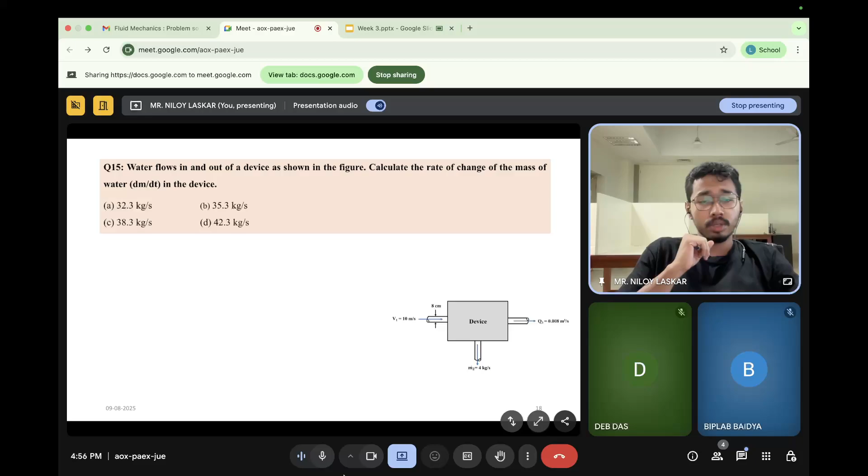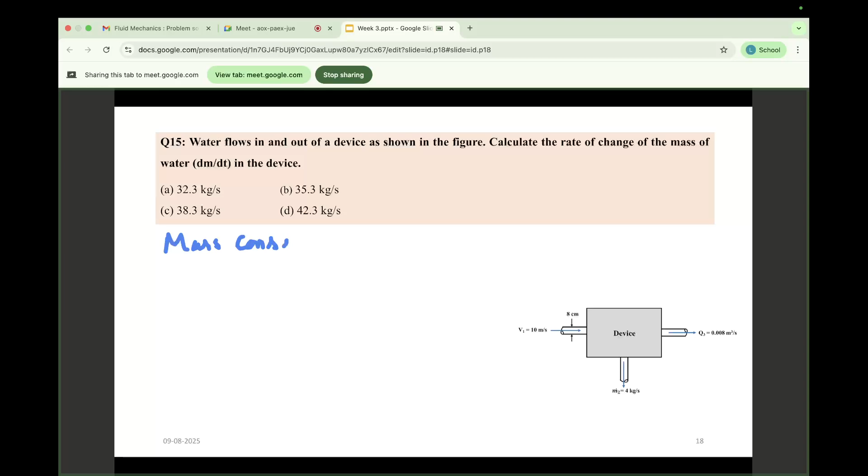So, okay, let me solve this one. So again, using the same concept, that is the mass conservation. So this mass conservation RTT theorem is quite essential for this chapter, and another thing is conservation of momentum. So please have a look into this carefully, because you will definitely find some important questions.

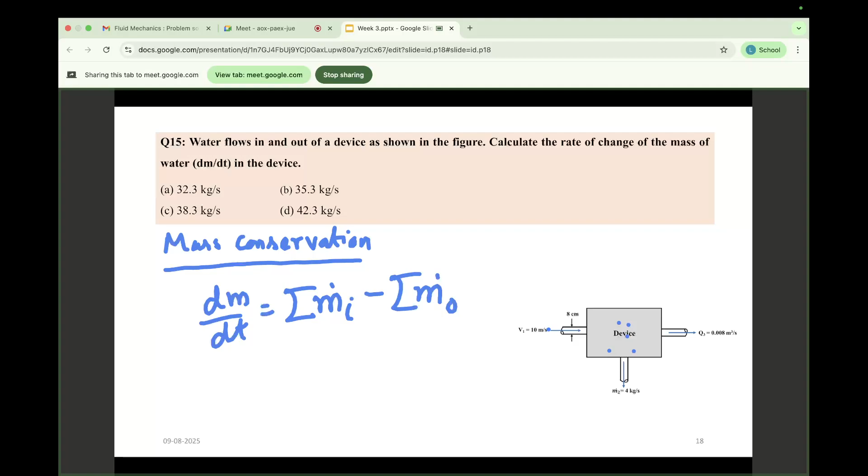So if something is accumulating in this system, if I represent it as dm by dt, it should be the total of the mass inlet in the system minus the total of the mass outlet in this system. So what is the mass inlet for this system? This m1 dot; only one inlet is there, so I can write it as m1.

And for mass outlet, there are two things, m2 and m3, that is m2 dot plus m3 dot. So in place of the summation of mi, I can write m1, because only one inlet is there, and two outlets are there, so I can write it as m2 dot plus m3 dot, right? Okay, so I have to find out this value of m1.

So velocity is given, so I can write m1 dot equal to rho a1 v1. So rho I know is 1000, diameter is given as 8 centimeter, so I can find the area, pi by 4 into diameter, that is 0.08 square, into velocity, that is 10 given here. So you just calculate this, you will get a value. So I am just calculating it for you.

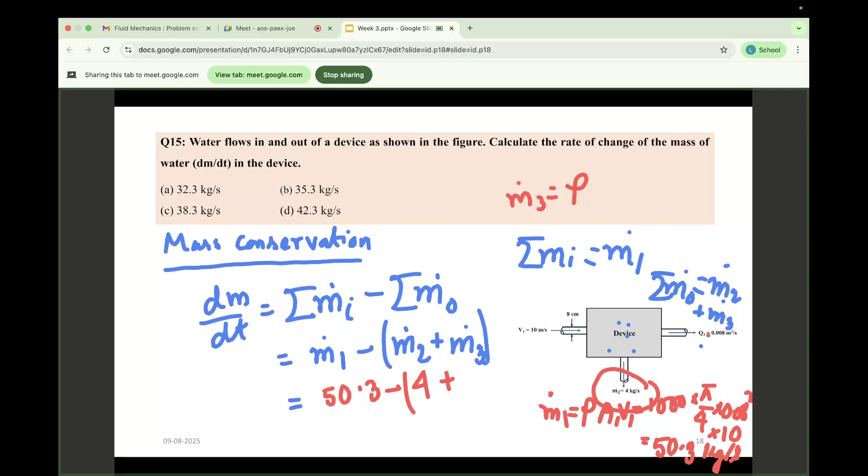So what I have got is 50.3 kg per second. So in place of m1 I can put 50.3, right? So m2 is already given as 4, so no need to calculate m2, but I have to calculate m3 dot. So for m3 dot, Q is given. What is Q? Q means A into V. Area and velocity are not given, but Q is given. So in place of A and V, I can write it as Q3.

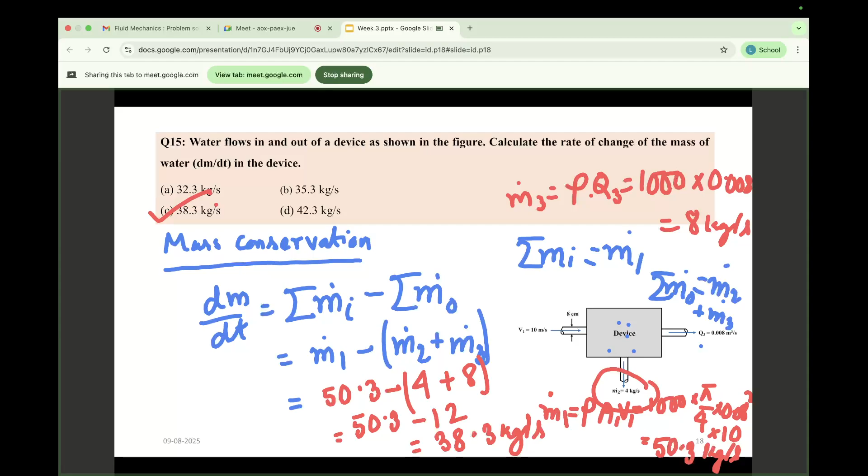So that is 1000 into 0.008. That means it should be 8 kg per second. So I can put 8 here. So that means 50.3 minus 12, which is 38.3 kg per second. So option C is the correct answer. And Dave has answered this correctly. Today Dave has answered most of the answers correctly, and also Harini has answered.